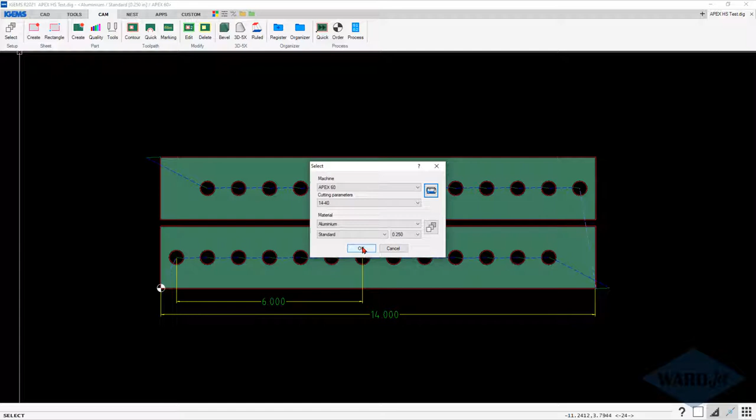To begin with, I've got my Apex 60 machine selected, and I'm using a post processor from January 15th, 2021. And I've got this for 1/4" aluminum. Height setter can work 3 different ways, either Sheetwise, Partwise, or you can give it a stamping distance.

Sheetwise, it would just probe once on the first cut on the nested sheet. Partwise, it'll probe once on the first pierce for each part, so in this case it would probe twice. Or you can give it a stamping distance, and if we give it a distance of say 6 inches, then once it gets to that distance away from the last probe, then it will probe again.

So in this part it's going to probe on the first cut, and if we set to 6 inches, it should probe on this cut here, here, and then if we draw a circle at the center of this one here with a 6-inch radius, then it should probe on this hole here, and then another 6-inch radius it'll probe on that if we give it a 6-inch stamping distance.

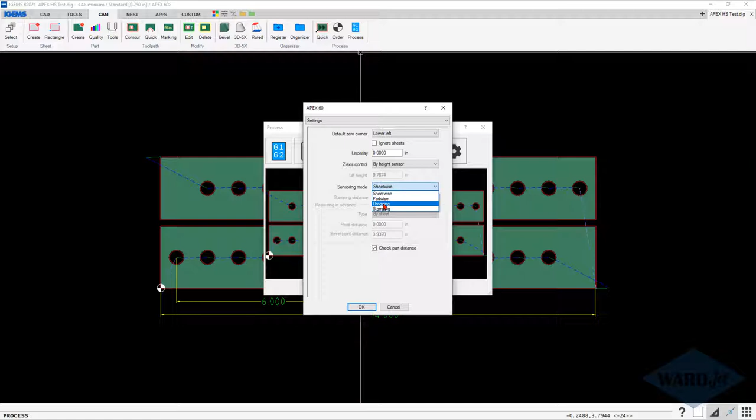So to tell it what mode you want to run that in the process area, click on the gear for settings and go to settings, and Z-axis control should be height sensor, and in the pull down here you've got your Sheetwise, Partwise, and stamping selections. Dragging is not supported by the height setter.

So if we set to Sheetwise, then we'll see that it'll probe once at the very beginning, and put a note down here at the end of the CNC file for our height setter count 1. There's also a dialog box that pops up before you get in there that tells you that.

And if we change this to be Partwise, so now the height setter count is 2. So of course we'll still do it on the first cut, and then if we scroll down to the start of the second part, it does the M402 there for the next height setter, and we've got that confirmation down there at the bottom.

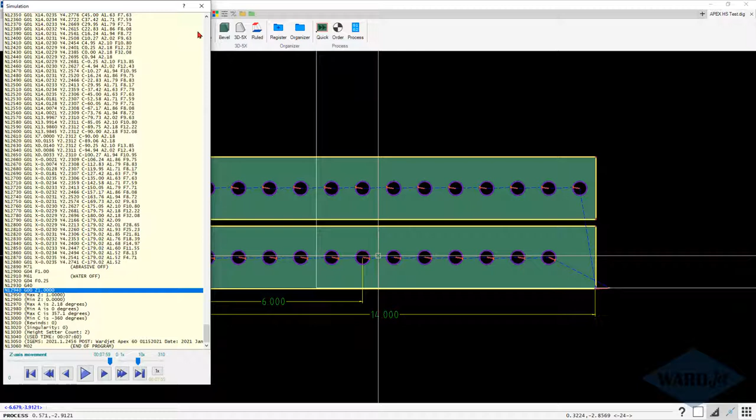And then if we switch it to stamping and we use a 6-inch stamping distance, then we've got the 5 height setters. Again, first cut, and then 6th cut, which will be up here a little bit. One more cut, there it is.

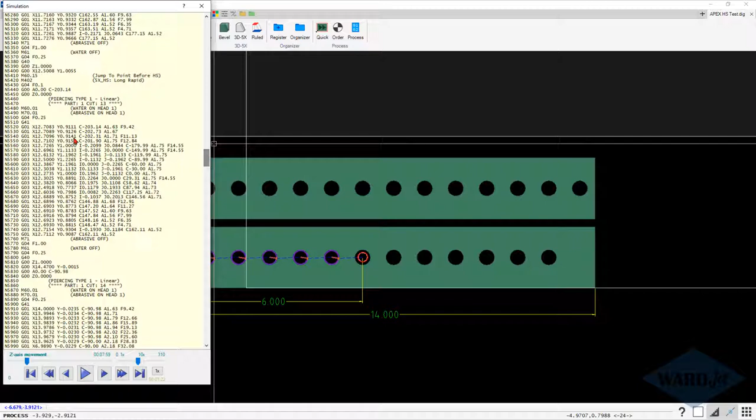And then on the last hole there before the outside cut, which will be right there. And then a little bit further down here in the program, I've got that one there, and then should be finally before the outside cut for the 5th one.

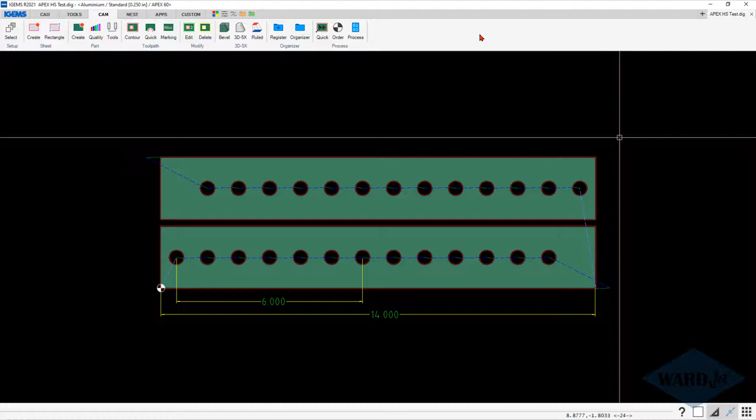You can also force the height setter to probe for a particular cut. So if we wanted to force it to do a height setter routine on this outside cut, we can go up to Edit and then click on the part, and then go down to the cut that you want to add that height setter routine to.

And in this attribute box, there's some different attributes we can put in here to trigger the height setter. So if it's not already in there, hit the plus sign, put in capital HS for height setter, and that height setter attribute is now added to this cut here, and then the height setter will trigger for that cut.

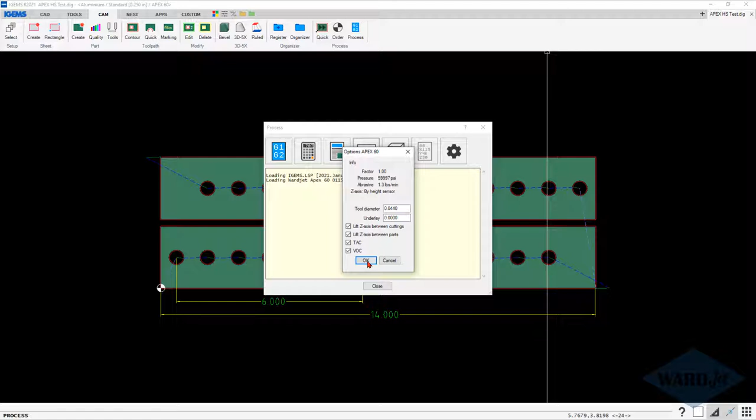So if we go back to process, so now we've got 6 height setters. Since it was already probing for the outside cut on the second part, I didn't need to add it to that one. And if we scroll down here to this cut here, now we see that it's doing the height setter on that cut also.

So those are the options for 2D, and now I'll show you a part in the 3D 5X area.

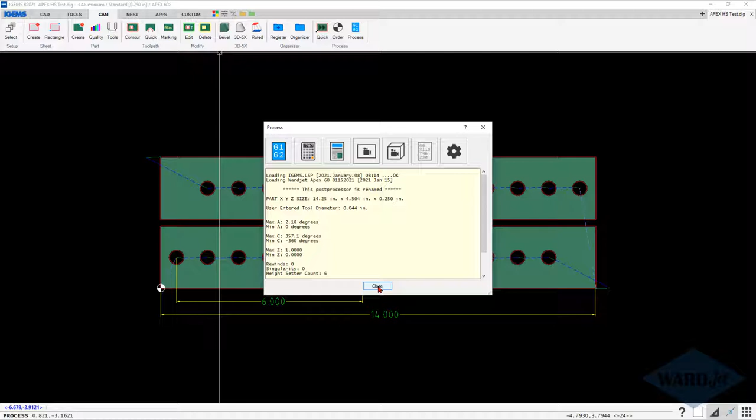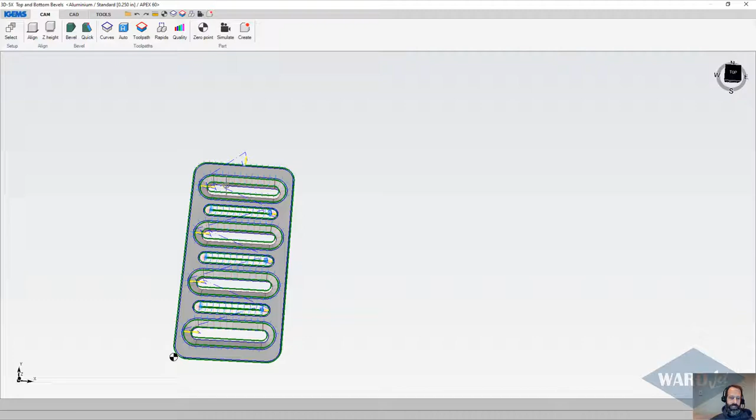So we'll take a look at this 3D 5X part. In this example, I'm setting the stamping distance to 3 inches. So here's the part with some countersinks. So the idea of the stamping distance works the same. You give it a radius, and once it gets outside that radius, it'll do the probe again.

So what you want to be careful about is if you have any situations like this where you have something like a countersink, where in this case we're going to be cutting the vertical slot first, and then we'll come back and do the countersink on that. You want to be careful that the height setter is not going to come down on the countersink,

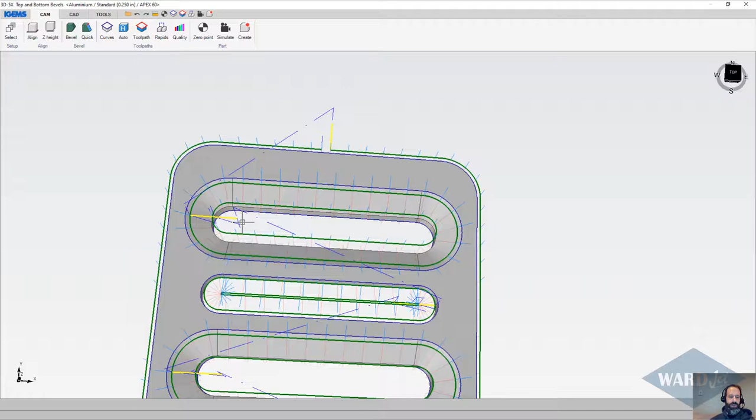because this slug for the vertical cut will have dropped out, and then obviously it'll come down with the height setter, and there won't be anything there, and it'll go down and cause all sorts of havoc. So you have to pay a little bit of attention to that if you're doing two cuts in basically the same area.

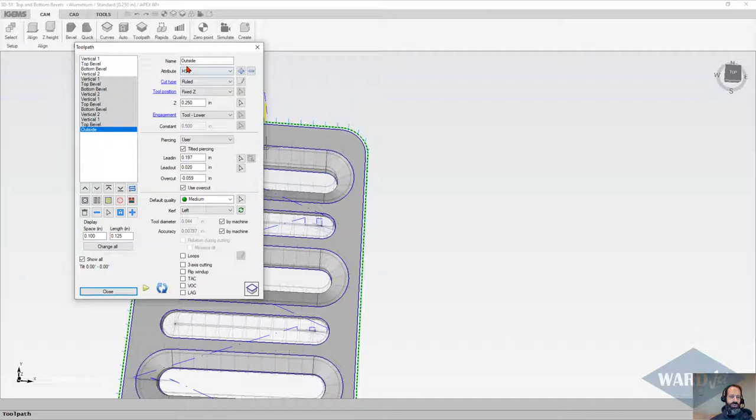In the toolpath box at the end of 2020, they added this attribute box, so similar to the 2D area. If you do want to force it to do a height setter on the outside, if that height setter attribute's not already there, again, you just click on the plus sign, type in uppercase HS, and you can add that to that outside cut to force it to do the height setter on a particular cut.

So let's go ahead and update this part, we'll just do it in 2D mode. Show us what we want to see here. So we got height setter count 3. I do have my stamping distance set to 3 inches now, so it's gonna do it.

And then what I've done is given you this warning here where if there's an area where it's gonna do a height setter within, I believe it's ½ inch of where it's done a previous height setter, it's going to give you this warning here to check and see if you've got an issue.

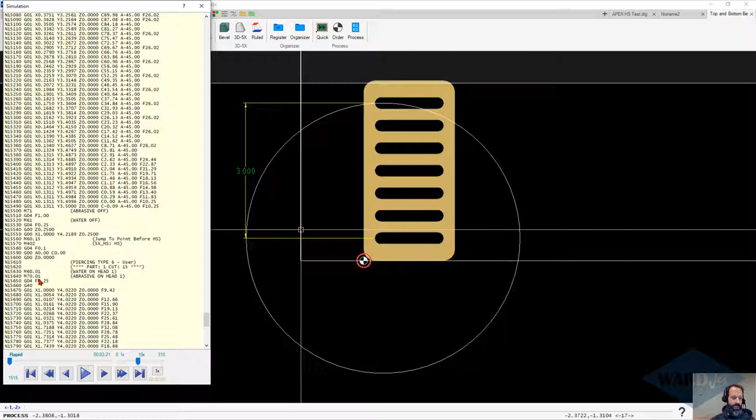So if we go down to cut 14, which will be second to last cut, so this is cut 15, the outside cut, where we do have our height setter since we put the attribute on there, and scroll up a little bit to cut 14, we've got it where it's doing the height setter on that, and it's not doing the height setter on the vertical cut because it's just at, or just slightly, like 1/10 of a 1,000th of an inch inside of that 3-inch radius.

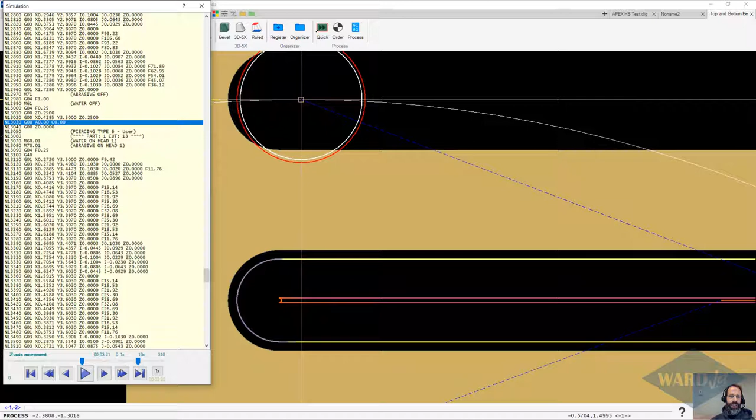So if I set this stamping distance to 2.9999, then we're not going to get a warning, because now this lead-in for the vertical cut is just outside of that 2.9999 radius, and it'll do the height setter on the vertical cut.

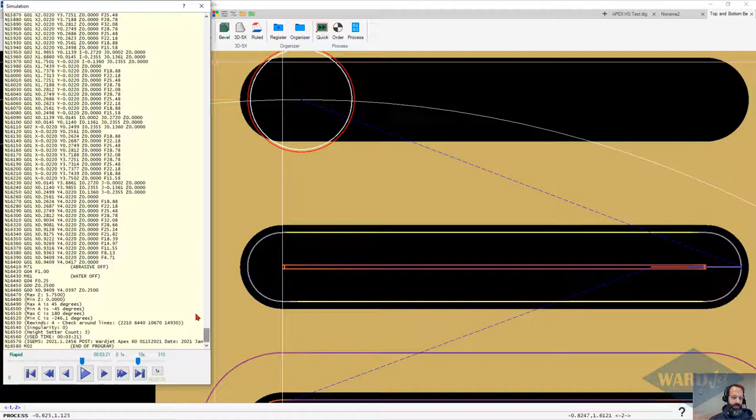And then it's not going to do it, of course, on the countersink now, since that's within that 3-inch radius, and then we'll do it on the outside cut because we had put the attribute on it to do that. So just be careful if you are doing your height setters on countersinks like that. I do have the warning built in there.

If we press F5, that'll bring up your post processor, and if you scroll down, I've got this line here, HS safety zone 12.7, or ½ inch, so if it sees that it's going to do a height setter within ½ an inch of where it's done a previous height setter routine, then that's where it's going to give you that warning.

So if you want to change that, you can come in here. This is of course in metric, so if you want it to be 1 inch, you make that 25.4 or whatever. If you do that, you can always do a file save as and give it a different name so you don't overwrite the original in case you're concerned about making any errors, or you can give me a call and I can adjust that for you.

But it's fairly simple just to change that number in millimeters if you want to change that safety zone.